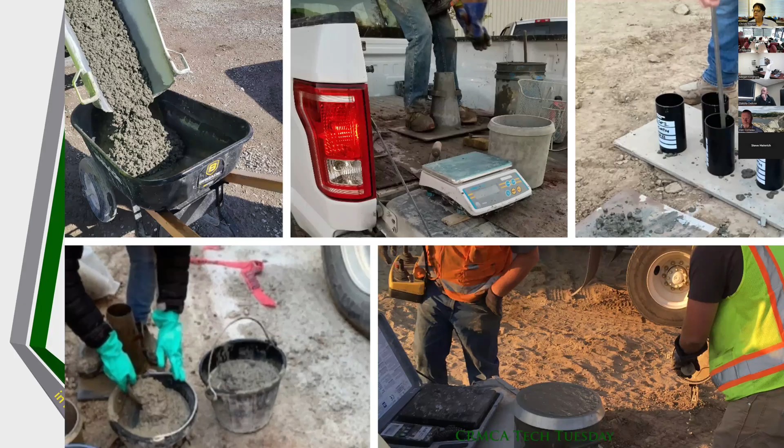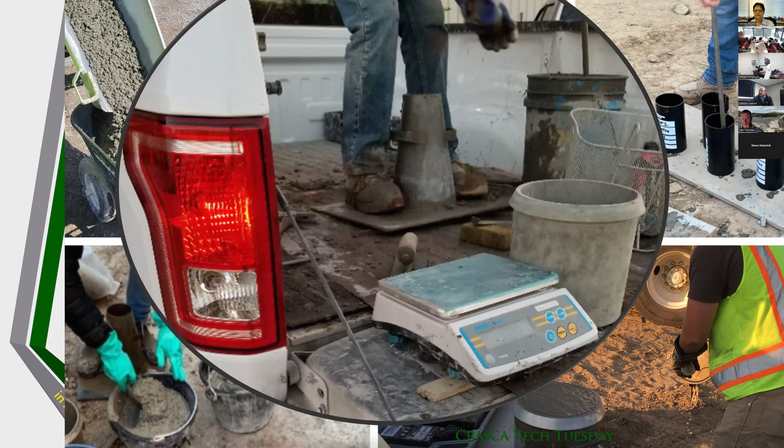So first off, before we even talk about what CTAC is, I like to talk about what we want to see in the field. What should we be seeing in the field? Some of the pictures I like to show are things that we do see out in the field. It's a wide range of different processes, from sampling to testing on the ground, as well as on the tailgate, and interestingly, testing slump inside the truck.

If you are familiar with testing procedures, that is not acceptable because it has to be on a vibration-free and rigid surface. Trucks have suspensions, so it doesn't quite meet those requirements. But we want to make sure that everybody's doing the same thing consistently for all of these procedures.

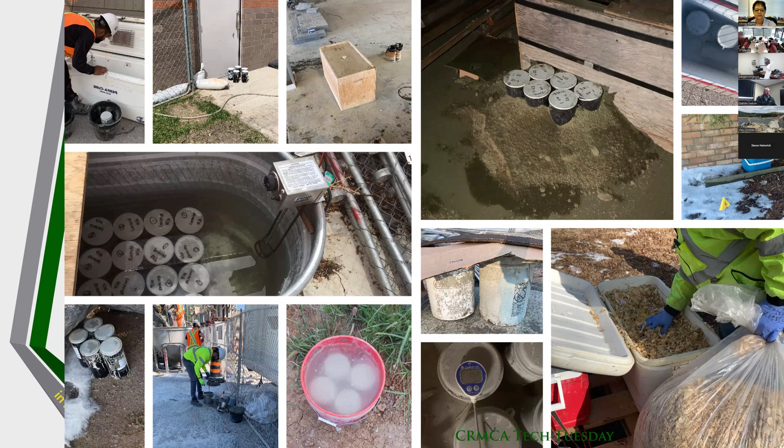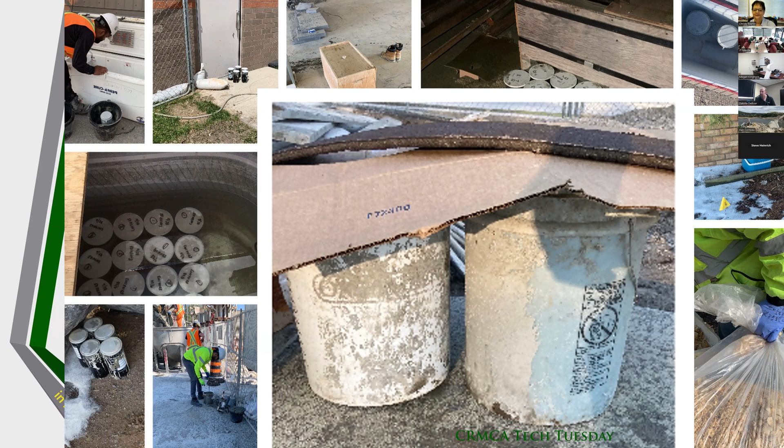This leads into initial curing as well. There are different options out there that can be used, from easy cure boxes to trough tanks to buckets, and also wood chips for insulation in the wintertime. But sometimes you've got to question it. What's really underneath that cardboard cover of those 5-gallon buckets? Are they submerged cylinders? Are they insulated? What's happening underneath those? It's a questionable issue. But also, is this a field cure cylinder or is this a standard cure cylinder?

We don't know. If it's a standard cure cylinder, it does not meet requirements. We want to make sure that they are all cured properly initially, as well as when they get back to the lab. So these are, again, things we want to make sure are happening consistently across the board. So how do we do that?

That is utilizing teamwork. And teamwork's not just having an app and being able to solve the problem, but it's how do you solve the problem? From the testing firm, you want to make sure that there are training opportunities for the testing firms. The producer wants to make sure that there's consistency in those concrete results. And the contractor could potentially be tracking information in regards to that testing, as well as the design engineer and owner having that confidence and being able to complete those projects on time.

It really does affect every single step of a concrete project, that testing. It is an important process that we evaluate over the course of every project to make sure that it meets those specifications on a project. So if we are meeting specifications, are they meeting the standards as well? And we want to make sure that everybody does it the same way. And you can keep hearing me say that over and over again.

So what is CTAC? CTAC essentially ensures consistent and reliable testing, enhancing overall quality and accuracy of concrete testing. What does that mean? That means we want every single concrete test to be consistent and valued properly. We don't want to be questioning if those test results are valid. If the testing was done properly, we know that the test results are more accurate.

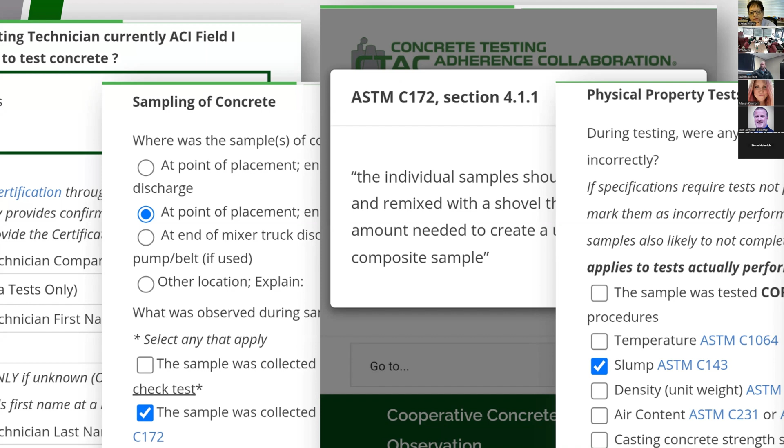You mentioned those spec summaries. Yes, so one thing mentioned just now is the spec summary. When there are ASTMs highlighted in blue, you can actually click and review a brief quote of what that ASTM standard states for that specific item. It's very helpful for those observers that, yes, they're going to be certified, but not everybody remembers every line from every ASTM.

I will be the first to admit that I do not memorize the ASTM standard numbers either. So ASTM C172, I believe that's sampling - from what I see, it looks like that's what it is. It can be used to educate job superintendents, owners, whatever, as you're looking at those. So it's an educational tool as well. Yes, thank you, Todd.

So the other observation option that we're going live with this week is the initial curing option, which is a review. These are for project site personnel - an individual out on site, such as a contractor foreman or supervisor or somebody authorized to be on a project. They may or may not be an ACI certified individual, but they are regularly involved in the concrete process on a project. They can go over and review what they see at the initial curing environment after the fact, not during a test, but anytime after the test.

So what they're going to be asking is what does the equipment and temperature device look like? Just like question 4 on the full observation - just saying, okay, this is what I see. I see a cooler, I see the cylinders are submerged, I see a heating device in that water as well. So I'm going to click on those. Then it's going to ask, can you read those specimens? Are they identified correctly with a project number, a ticket number, a date, that type of stuff, which they're supposed to be identified with.

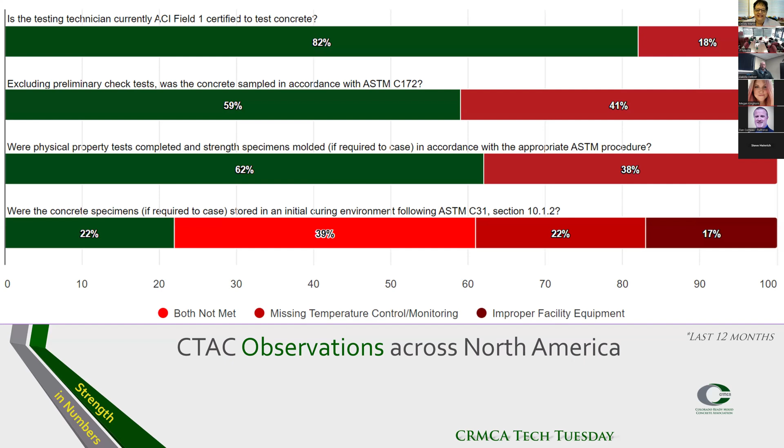This is where we go back to the communication issue - start talking about this on a project by project basis. We have individual project reports that company managers can access through the database and pull up regularly, sharing with the project team and saying, hey, this is what we saw last month, what can we do to make it better next month and be more consistent for the rest of the project so we don't have issues. Because if you don't have an issue, that doesn't mean everything's going smoothly. We want to make sure we utilize this information as best as possible.

That's for up to 48 hours before cylinders get transported to the lab. If that's not being done, how can we prove those cylinders are being cured within that time frame or temperature range? To show why this is so important, NRMCA has put out information just in the last year across the country, including New Mexico, Maryland, and Colorado, about curing cylinders within those ranges versus outside of them.

These are various cylinders that were cured at various temperatures, both high and low. Across the board, they are anywhere from 15 to 28% less strength than they should be. So the strength loss is significant if they're not within that 60 to 80 degrees for initial curing. It makes a big difference.

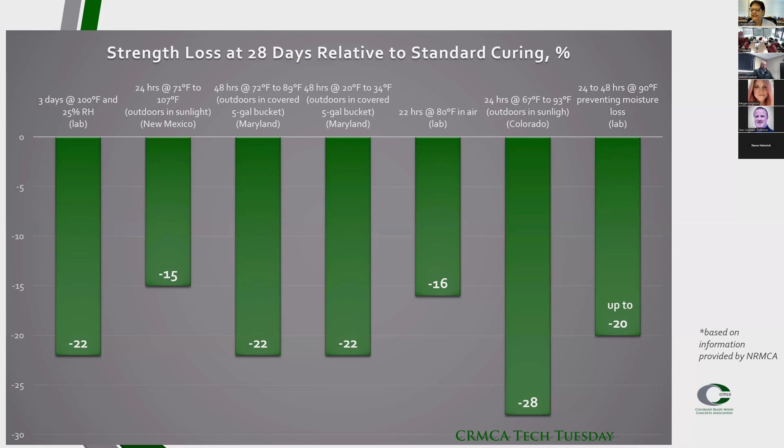Thank you, Todd. Thank you, my Colorado friends. I love my Colorado friends. This whole program is just a blessing.

I'm very excited about it, and excited to let your Tech Tuesday people in on the secrets that we have—not that we have any secrets. So I encourage, just like JT did, jump in and ask questions, interrupt me. I'd rather you ask when you think of it.

So we are new to this. We're only 3 years in, we're toddlers. Getting it off the ground, getting people out and trained, getting on their phones and getting the app going, getting them familiar with it, took a little bit more than I had originally expected, but we're finally there. 3 years into it, I'm so excited to share with you what we've learned.

First of all, yes, we agree that the observers must be ACI certified. We also ask their companies to make sure it's someone they believe in, someone who will be fair and professional, and someone who has a future in their company, because we don't want just anybody with an ACI certification out there. We want professionals, because integrity and things are at stake here.

We do ask our observers, whoever they work for, to try and do 2 observations a week. Now some of you may think, oh, that's not very much, because it's not. But some of you also think, wow, there's no way I can do that. So it's just an ask. These observers work for many companies, and the company makes a decision on how many observations they do a week.

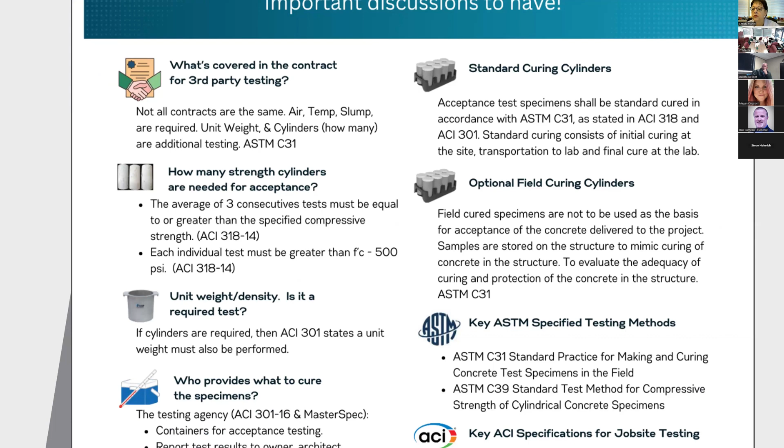So these contracts, go back and look at your contract. A lot of my municipalities don't even have unit weight in it, but yet they require cylinders. So I'm challenging them. Well, who's right here? You guys aren't even following the specification. And then the other thing is when you're going to do cylinders, how many cylinders? A lot of testing companies will do like 1 at 7, 2 at 28, and 1 at 56. So that's 4 cylinders, etc.

But the average of 3 consecutive tests must be equal or greater than the specified compressive strength. And if you don't have 3 cylinders, then you really can't make a fair judgment. And almost all of my contracts only have 4 here in Kansas City. So automatically, they don't really have enough to qualify to meet the spec for acceptance, truthfully, yes or no. So that is something a lot of people didn't even know. And it also depends on what size cylinder, if some people are on the older, bigger cylinders or the smaller ones.

And so over to the right of this, the standard curing and the optional curing. This is something I never paid a lot of attention to. But standard curing is when you're going to use the cylinders for acceptance. Are we going to accept this concrete or not? Well, if you're going to use it for acceptance, then it's stated in 318 and 301 that the standard curing consists of initial curing. You got to do it right. Got to put it in something. You got to have that thermometer in there. You got to track it. Transportation to the lab and final cure in the lab. All 3 of those make up standard curing.

And with this program, with CTAC, you can track at least on the job site. You can't really track the transportation to the lab and the cure at the lab, but you can control what you can control. But the optional field curing, this is where I have some job sites that were confused. Field cured specimens are not used on the basis of acceptance of the concrete that the ready mix producer delivers. They are more mimicking the curing on the site and to evaluate the appropriate stripping of forms or curing, things like that. And oftentimes field cured are left in the open anyway, because you want them cured like in the field. And we can get into a battle on that one.

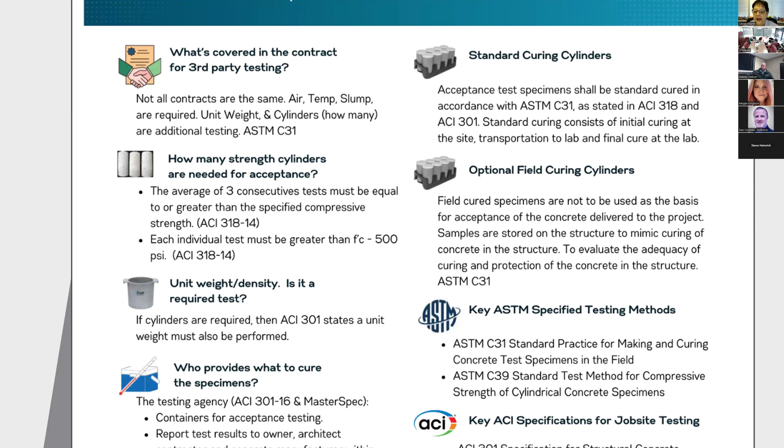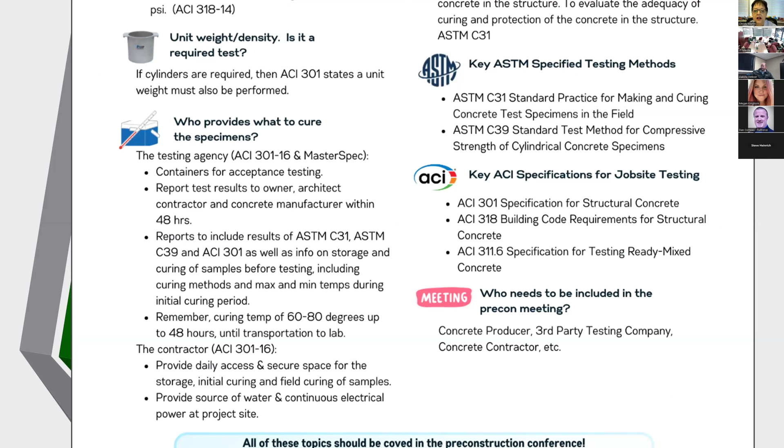But there's a huge difference between standard cure and optional cure. And a lot of people don't understand the difference. So you need to have that conversation because a lot of the people who have the contracts don't even know what they have. If I could scoot down a little bit, who provides what to cure? Who's in charge on the left-hand side? Who provides the curing stuff?

Okay, well, if you're a testing agency, there's a big difference here between ACI 301 and MasterSpec. MasterSpec is more of the architectural and the private industry world. A lot of these high rises and buildings per se end up with MasterSpec. In MasterSpec it is the testing agency's responsibility to put them in a safe spot, put them in something safe, and to take care of the temperature and record it. ACI 301-16, and I've read it 3 times, it's not very clear, truthfully. It's a little vague. It implies that it's the testing company, but it's not a legal document if you're going to look at that.

But I'm going to get ahead of myself here. But part of who provides what to cure is also reporting the report, excuse me. So you have to report the results to the owner, the architect, the contractor, concrete manufacturer within 48 hours. So many times the ready mix producer, the testing company will give it to the owner and that ends there. And so you're actually required by those standards to give them to everybody. And I try and encourage that.

The results have to include all the results of everything we just did, as well as the storage information, how they were stored, supposed to be recorded, the temperature is supposed to be recorded. All of that's part of the official curing. And we've already beat it with a stick that is 60 to 80 degrees, which I think 99% of you probably already know.

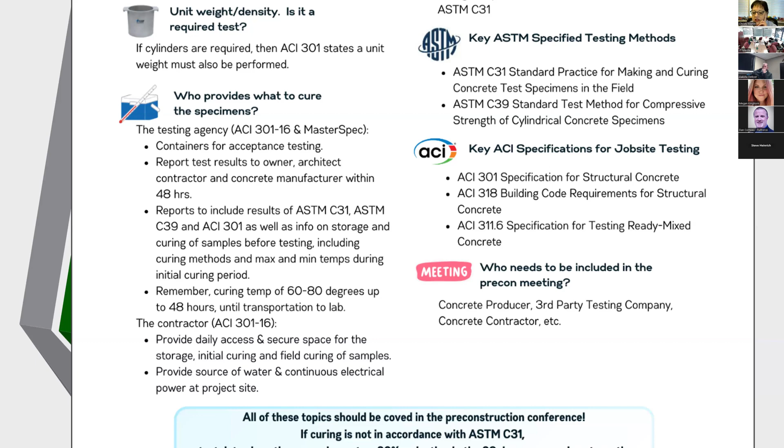And if you don't accomplish anything else, that is it. That is our goal. If you solve that there, then you won't have any problems. But if you don't solve that there, you're not gonna have a good result. You're gonna have a mess. And back to where we are right now before we start anything. So also on the sheet, it kind of identifies all the ASTMs and ACI related.

So discover what's happening in the real world. I get talking too fast. Compare to what the standards are. Communicate with the stakeholders the proper standards and procedures. That's what I'm doing right now. And keep testing and doing those observations to see if the cycle improves.

It is so hard to get going, but once you do with this program and you start getting results and you start talking about this, I've talked with city engineers, I've talked with general contractors, I've talked with concrete contractors, I've talked to my board of directors, I've talked till I'm purple in the face and I'm just getting started, and now I'm talking to you about it. We can't stop.

If we can figure out what's in the contract, is it right? Do we have the tests all in there? Are we curing them properly? Do we know who's going to do it? Then we will make some progress. Next slide, please. Did I beat that with the stick enough?

So here's what I want to leave you with. Many of you right now, we all are dealing with 1L, Portland limestone cement across the United States. Relatively new; for hundreds of years we had type 1, 2, or 1/2 or whatever you had in your market. But now we have the 1L, and things are not the same. They are the same, but they're different. The cement industry tried very hard to make the 1L as close to their 1/2 as possible. They really worked hard at it. It's not exactly the same.

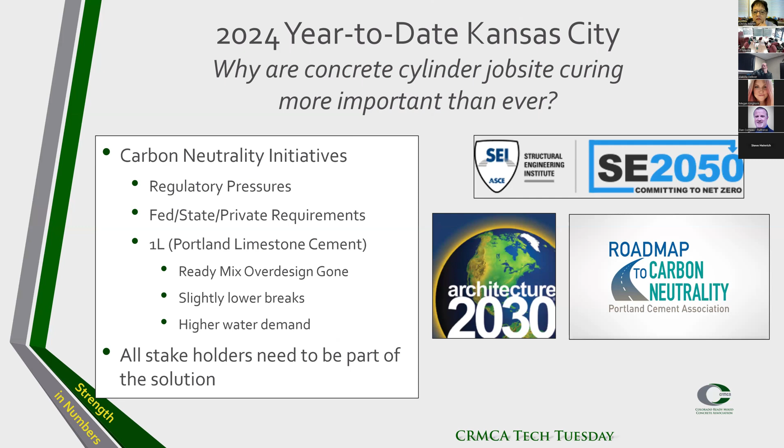So success stories. Let me wrap it up with this. I have testing companies who never, ever, ever had containers in the field go buy 200 coolers last spring. And to me, that's a huge success because they never provided them ever. And because of this, they are now. Now, they've got to get min-max and water. Another completely different testing company had the coolers, they didn't have min-max thermometers. Now they do. Guess what? They have to record the min-max. They're in there, but when they pick them up, they're not recording it. So, baby steps, baby steps.

We're getting there. I told you that we have a field technician that's getting all kinds of kudos for being 100% correct and a pat on the back. Better a pat on the back than a stab in the back, that's for sure.

Okay, so the municipalities that I have, the city inspectors, the two, they use the CTAC app to make sure that testing's being done correctly because it's their reminder. But guess what I learned? The inspectors can't accept a failure. They can't accept if it's wrong. That's why they're there. So they're more liable if they record something is wrong. So now what's happening, CTAC's not being used as intended, except that if they're not rodding that cylinder correctly or the air pot or whatever, they have to stop them and correct it, and they can't record it as incorrect. They have to have them do it over.